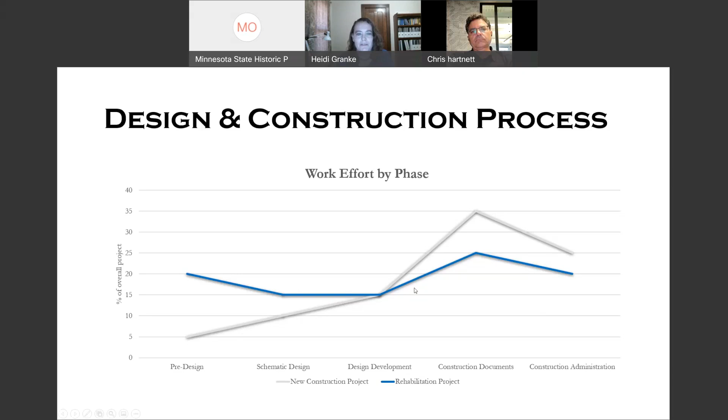It does also take us a little bit longer overall to do the design work on a restoration project. So we just want to make sure that people realize that sometimes our clients pay us based on this new construction scenario, but we're actually doing the work based on the real life scenario of working on a rehab project.

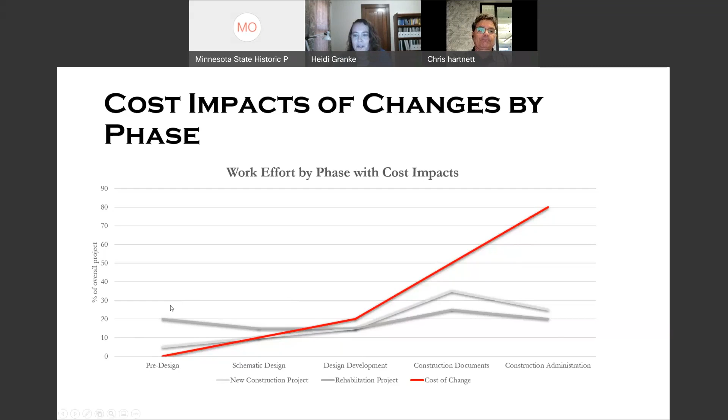So why is this so important? The further into a project that you get, the more a change in the project scope changes the cost of the project. So the more research and investigation we can do up front on the project, the more we can avoid some unexpected changes at the end of the project. This is particularly important if you have limited funding on your project, if you're grant funded or something like that. So that extra money that you may have to put up front for us to do this extra work is going to pay off at the end of the project.

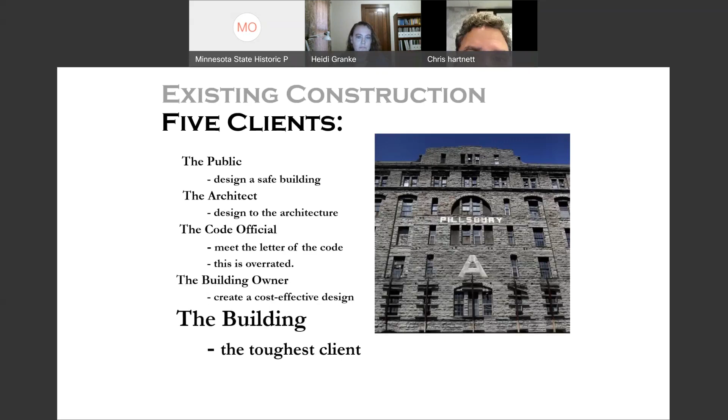then if you go to the next slide, the existing building project has 5 clients, the same 4, and then there's the building, which is really the toughest client. And something that all of us who've done this, if we've done it the first few times kind of poorly, we didn't realize it and we learned our lessons. And hopefully the next slide will give you some reasons why it is the toughest client.

The building, I mean, it's quite stubborn. It doesn't move. It doesn't give in. It doesn't allow you to convince it that it should do something it doesn't want to do. And basically it's very expensive to change. It's one thing for an architect to say to a structural engineer, I need to move that column. So you go into Revit and you move a box and it's all changed and everybody responds to it. Well, in a building, it's there and we have to do something physically to it. So it's much more expensive.

It's mysterious. It's usually covered, so we don't really know what's there. I mean, how many times have you put down to remove a wall and find out it's a bearing wall? And there's just never enough money to investigate up front. And so as designers, we have to decide how much of that investigation is done up front by us and how much do we leave for the contractor and deal with it through the RFI process. And that's always a hard thing to do. It's certainly more expensive to do it on the back end, but again, we never have enough money up front.

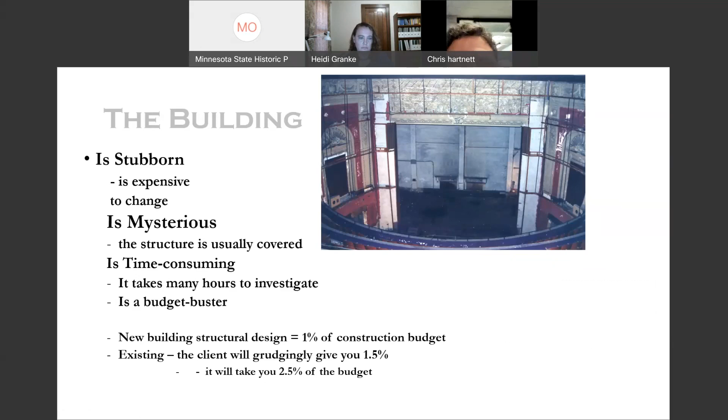Okay, I'm done. So there's 3 main tasks that we like to do before we start design on the building. We want to do the historical research on the building, which includes a lot of different things. We'll go through this point by point further on, so I'm not going to get into it right now. The second part is the documentation of the existing conditions, and then the actual building itself, and then the conditions. These are all related and interrelated. So one will inform the other.

We may be doing some work on the building, in which we identify a couple of building components, and then we go back and we do research on those components. So we've divided this as 3 things, but these really happen simultaneously and are interconnected.

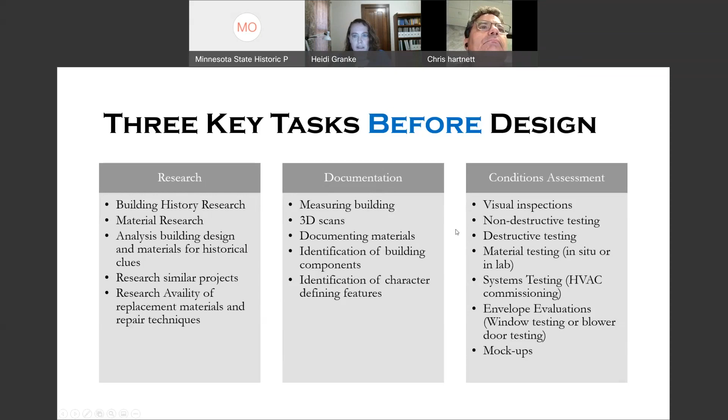So who needs to be on this kind of pre-design team? Really, it's anybody that's going to be working on the project, but then there's a few other people that we might add in that might not be on a typical project. So architectural and art conservators, materials testing laboratories. We may be working with building suppliers just to make sure that we can get materials we need to repair things. And we may need some special access to look at things. So we may bring in some people for that.

So the first thing we start with is historical research. We always start with what's the most available. So the secondary research is usually the National Register nominations or historic structures reports. And the key thing here is we look at the bibliographies and the footnotes on these and see where the primary sources are. And then we go look at those.

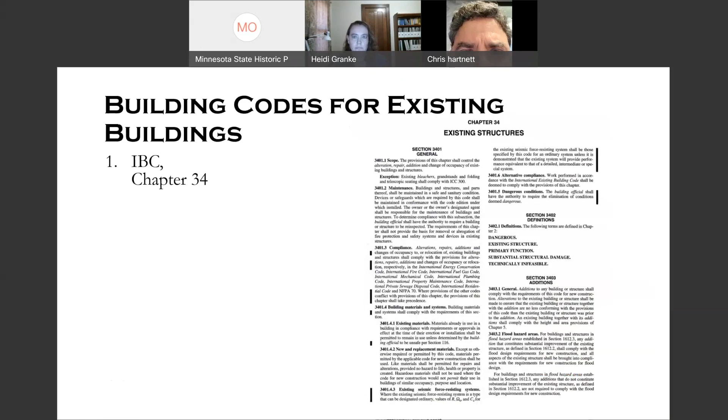And then to the extent that you can, you want to try to find any existing drawings for this building or similar buildings by the same architect. These drawings are worth their weight in gold, because they will show you oftentimes what's behind those walls, and for the structure, what's in that concrete, because so much of any kind of concrete structure is the rebar in there, and you just don't know that unless you have that information. Of course, even when you see that on the drawings, it doesn't mean they're necessarily as built. You do have to do some checking on that.

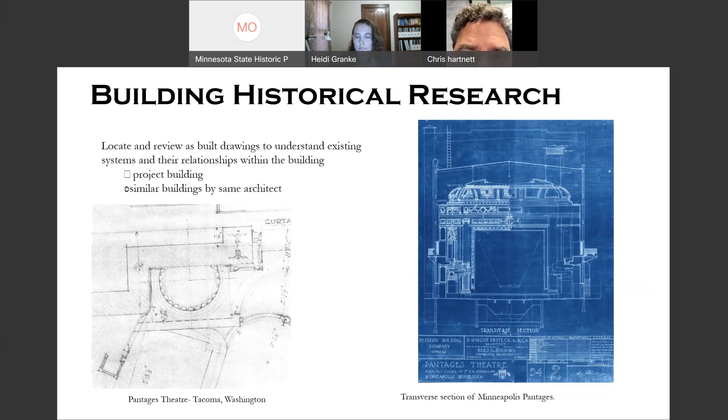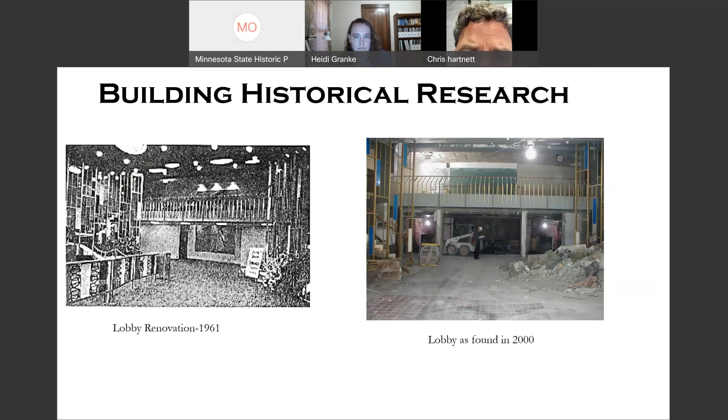Newspaper research helps. Sometimes it provides some things too. So you have to be a little bit creative. I'll say that on the state capitol project, one of my first bits of information was just a guidebook that I found the first time I went into the Capitol. At their visitor's desk, they had a little guidebook that I picked up that had a reference to a 1901 letter. So that's pretty good stuff.

So anyway, okay. And of course, the IEBC is something to dig into. There's a lot of opportunities there to get some special considerations for existing buildings that you don't have for new.

Of course, we have the Minnesota Conservation Code for existing buildings that I've used in the past, and it really is a compilation of the IEBC. It also has fire ratings for historic materials. So anytime you can become conversant with these different publications, it's important to be familiar with those.

So I guess I'm just going to interject. One other thing that's helpful is sometimes if you know which building code the building was built under, you can look up those standards as well, and that can give you some clues on how the building was built. Yeah, that's really key because structurally, if you don't add any load to something and it met code at the time that it was built, you can grandfather that in. But it's important to know when that code is.

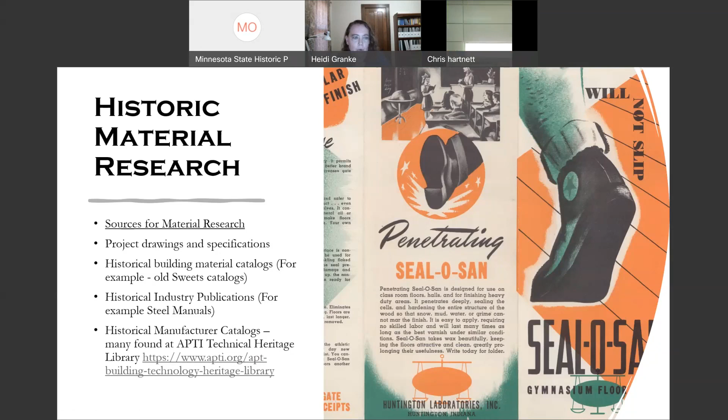So these are some more publications that I use. If you don't have a Kidder-Parker, I would strongly suggest you go out and find one. I got mine for $16 before Amazon was around, and it has all kinds of terrific information for the architects and the builders. It's a compilation of anything from acoustics to elevators to footings.

There's an AISC guide for structural engineers out there on rehabilitation and retrofit, very good. And then the ASCE standard guidelines for structural condition assessment of existing buildings. That's terrific in that it has a table of all the different tests that you should do for the different materials. It's invaluable.

Hey Heidi, one housekeeping. I don't have the slide number in front of me, so I can't do the timekeeping quite so well as I had hoped. So it sounds like you're doing it. Yeah, okay, that's why I'm trying to move the slides a little bit quicker. We're running a little slow here.

Sounds good. This is again, as you find systems within a building, this is an old Guastavino cantilevered stair, literally cantilevering off the walls. I had no idea what it was, and I was able to go in and find his patent for it. So I learned what that was. So again, be creative, fascinating stuff, but you really do have to look around. You have to be a bit of a sleuth on this stuff.

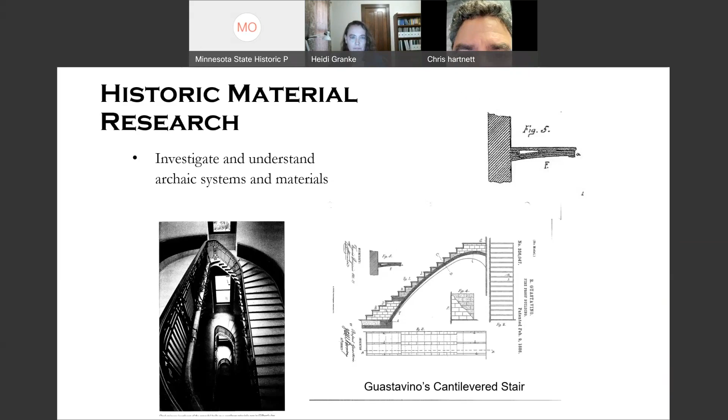So the building itself often gives us a lot of historical clues as well, which will help us date a building. Some component of the building may give us clues that will inform other components of the building. This is kind of the classic: different types of nails, different sizes of wood framing, different types of rivets and bolt connections and that kind of thing.

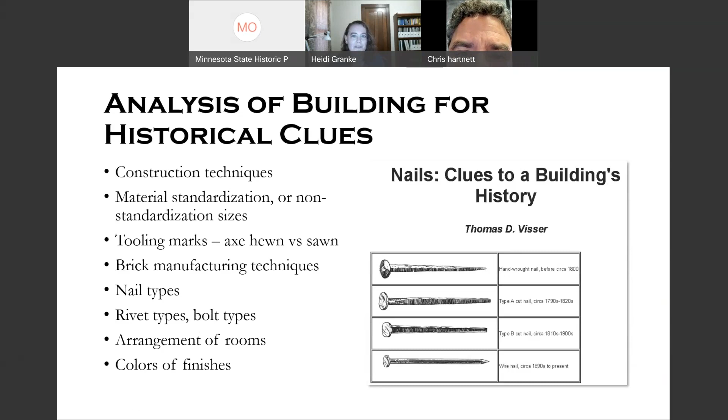And then also the color of the finishes in the room. You can go back to the original finish colors. We all know what 70s colors look like. If you find those in a room, you know that's what it's from, right? So those are all clues that we look for in the building itself that help inform that historical research.

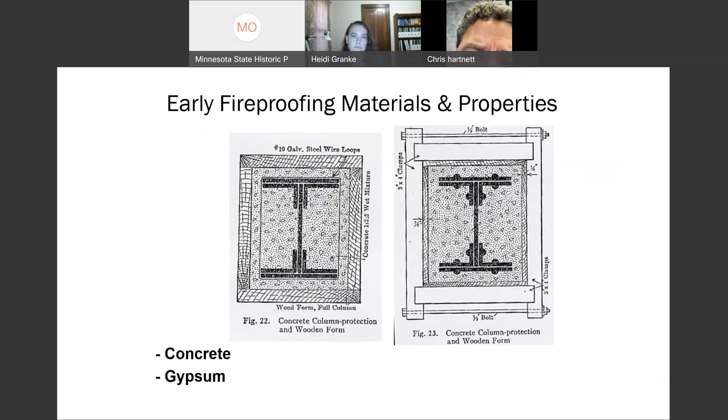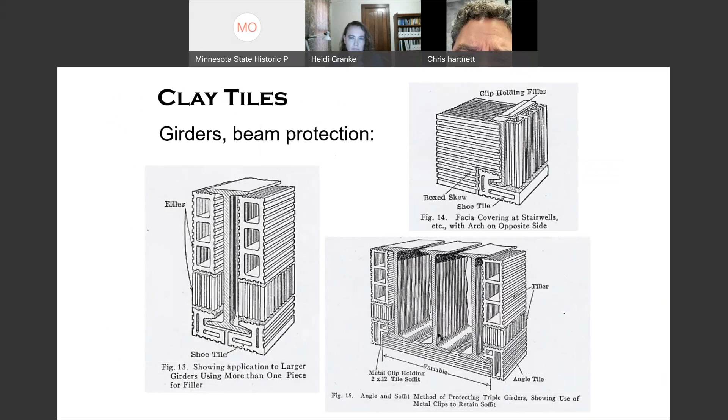Yeah, and so a lot of those references will tell you how these things are built. There's 3 or 4 slides now with just a number of different kind of sketches that I found, I think mostly in Kidder Parker, but in some others too. And they just allow you to see and understand what's there in front of you. So this is just kind of the wealth of information that's available to you.

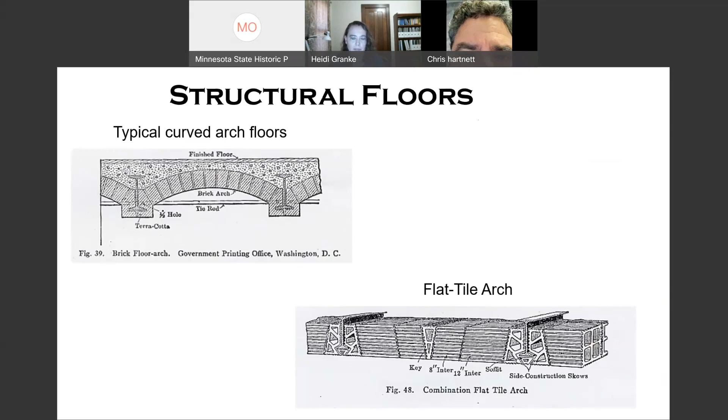So it's really good stuff, and it's well worth your time to do that research, and also to reach out to those of us in the industry asking for that. I'm happy to provide any information I can. We're all kind of in this together, so it's really fun to help people. So keep that in mind as well.

So the other thing that we need to research is just the availability of craftspeople to do some of this work. This is the Conrad Schmitt studio in Wisconsin. They've done some of the work at the state capitol, but they've done work all over the country. And there's some things that we can't replicate because there aren't craftspeople available or there aren't the original materials available. So that's one of the things that we have to look at up close so that we understand that as we move forward.

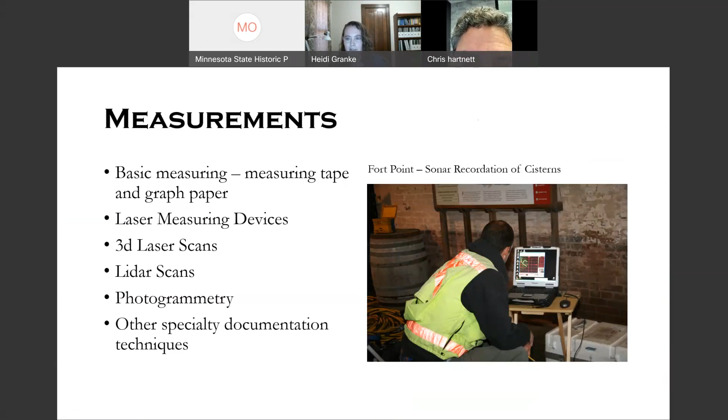So the next thing we do is we just got to do some measurements. There's all the standard ways that we measure, but sometimes we have to use something unique. This is some work I did at Fort Point in San Francisco. We had some underground cisterns that were full of water, so we actually measured them with sonar. I know there's a presentation coming later in this conference on some underwater archaeology and preservation, so I'm interested in that since I got to dabble in a little bit of sonar stuff myself.

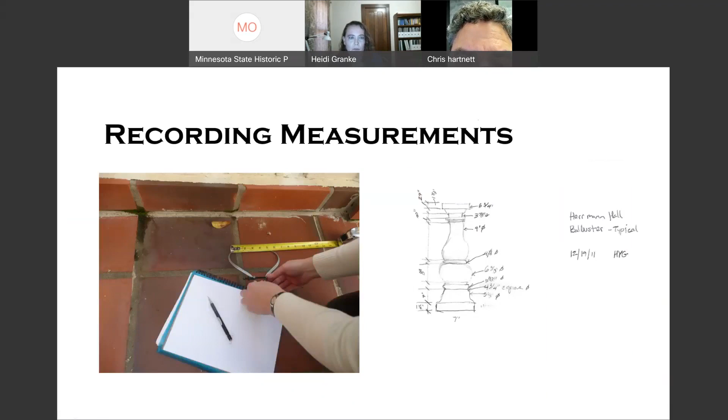So here's just some of the kind of standard tools. I'm sure you're all familiar with all of these. And then of course we record it, and there's several different ways. This is just a hand sketch, which is kind of the old school way, I guess, of doing that.

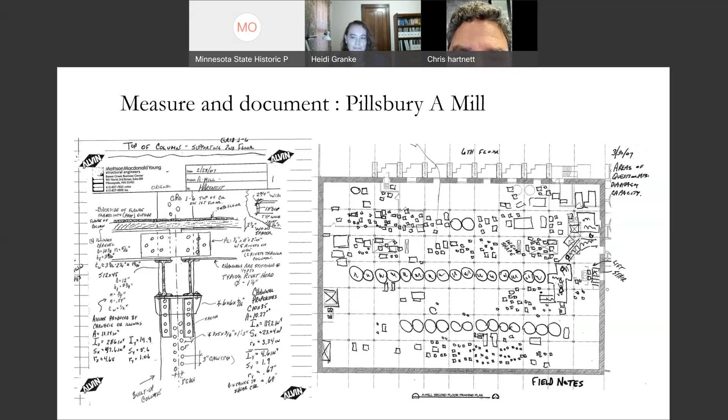So it really is, you measure it and you kind of try to figure it out as you go. It doesn't have to be beautiful. I tell you what, I am not a great artist, but it'll give the information you need.

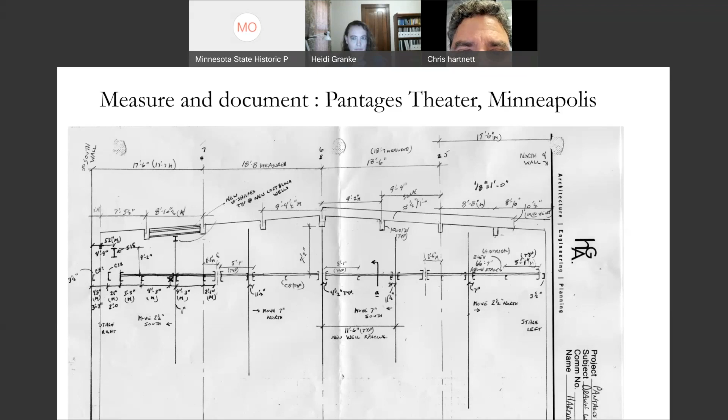Here again, this is the Pantages Theater. It had to meet the Actors Guild requirements for hanging flats, and the gridiron, up in the stage house, did not match that. It was an old vaudeville house. So I had to go in and measure this thing. I spent about 2 months sitting on a lawn chair, 67 feet in the air, just measuring and trying to figure it all out. And based on that, I was able to come up with this drawing of the final changes to it.

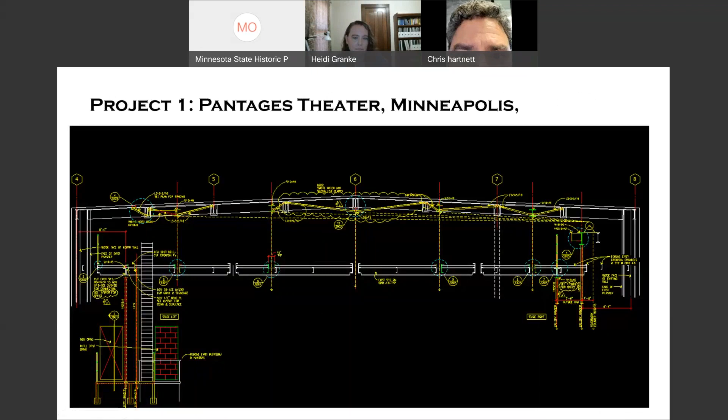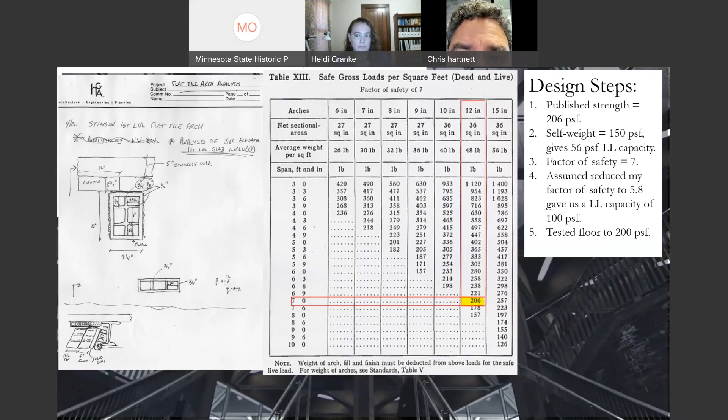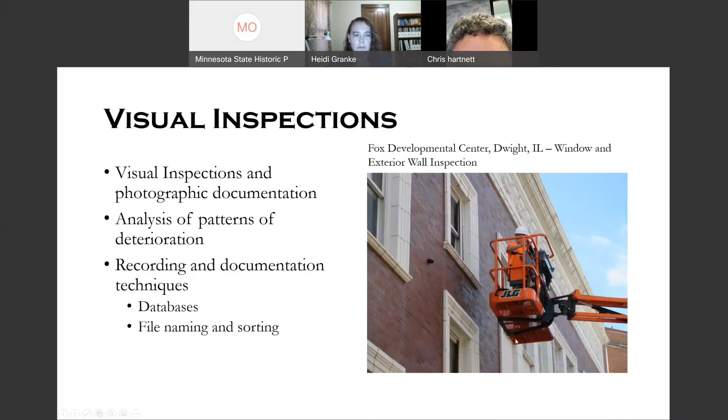So the first thing we usually start with in the actual condition assessment is just visual inspections. That's partly just walking around the building on the inside and out. Sometimes we have to access it from a lift or from a swing stage, or even hanging on rope access or something like that. And then we have to record everything.

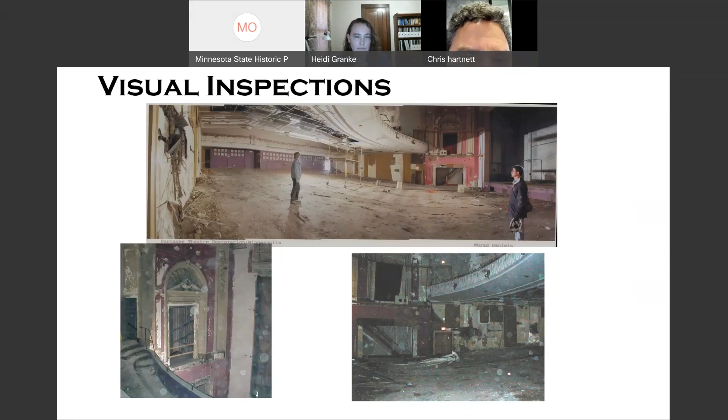You just have to go in and start walking around the old building, just familiarize yourself with it. This is just kind of an idea of what our old theater looked like to start. Sometimes it's not pretty. And in this, I was up in the dome, I was concerned about some water penetrations in there. So it's a reflected ceiling plan of the second dome. There's 3 domes in the Capitol, and just laying out where the water penetration is and trying to get a sense of why and the issues that might be there.

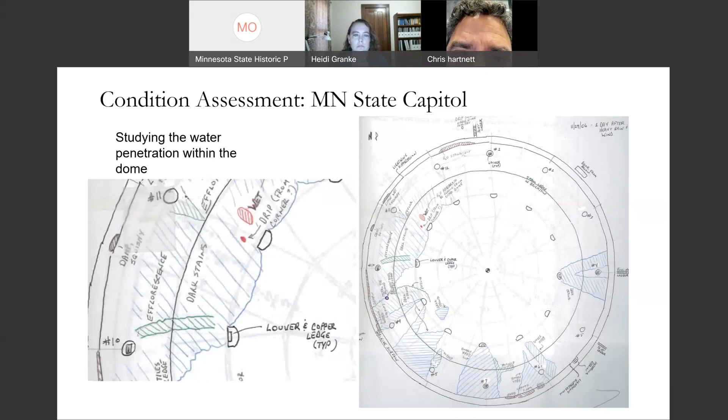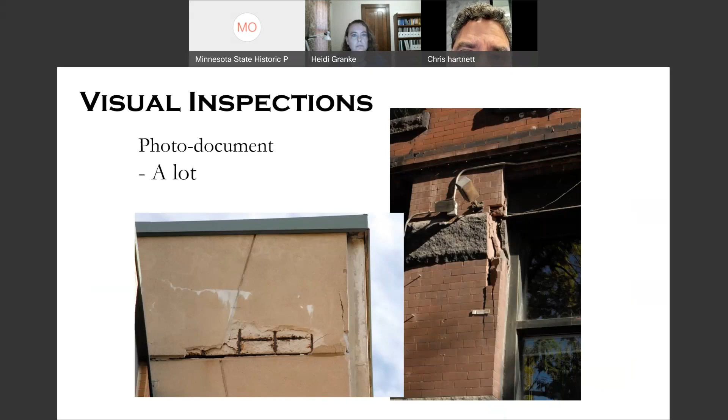Also, again, you want to photo document, and I say a lot. What I do now is I photo document with my phone. I have a long lens on a good camera for distant shots, but I also videotape a lot now because I never get the right photo, right? I'm 2 inches off, 3 inches below what I need, but with the video, a lot of times I'll just go through and video the whole scene, and often I can find a frame that gives me what I need. So I really recommend that. Again, take pictures that you can.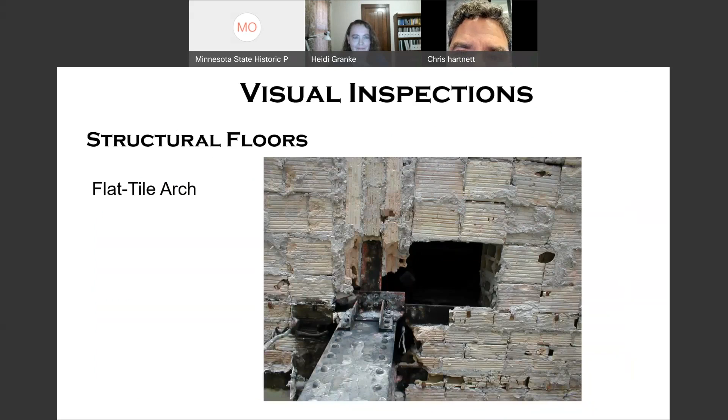This is the flat tile arch for a building that I had no clue about. There is no class in modern structural engineering that doesn't have to do with preservation where you see a floor like this. So, a riveted column with a flat tile arch. So yeah, take pictures. One of the things that is often helpful when you're taking pictures is to put a tape in it or some other visual cue. So this is just an example of that. And then be creative in how you take the photos too.

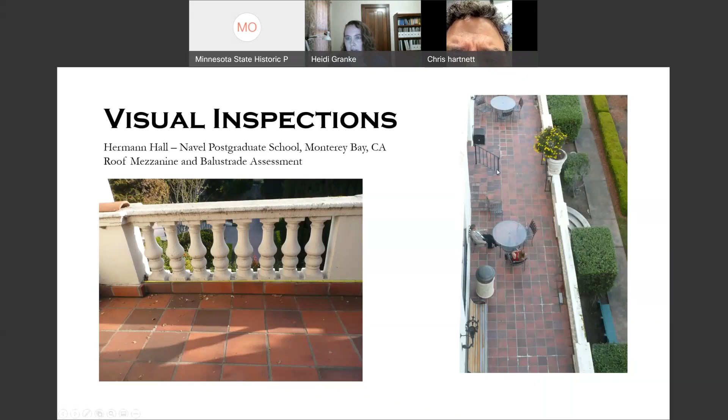This photo on the right here was a tall building, originally built as a hotel, but now an administrative building. We were able to go up to the upper floors and look down on this roof plaza that was leaking, and you can clearly see the areas that have efflorescence on them, and you know that those are the areas where there's been water standing.

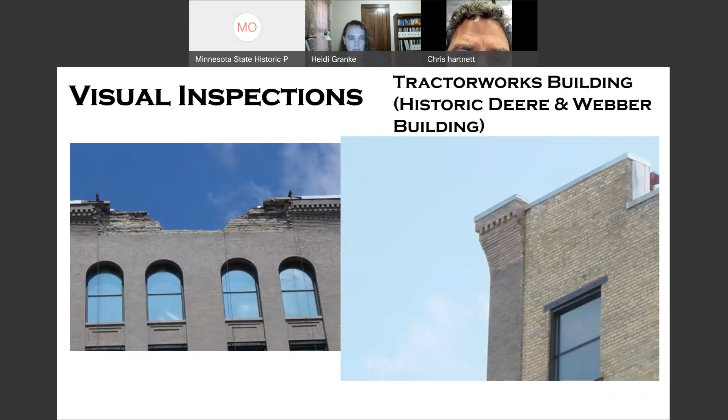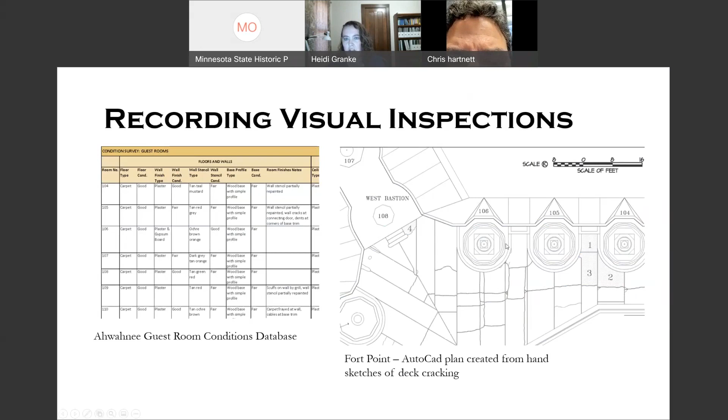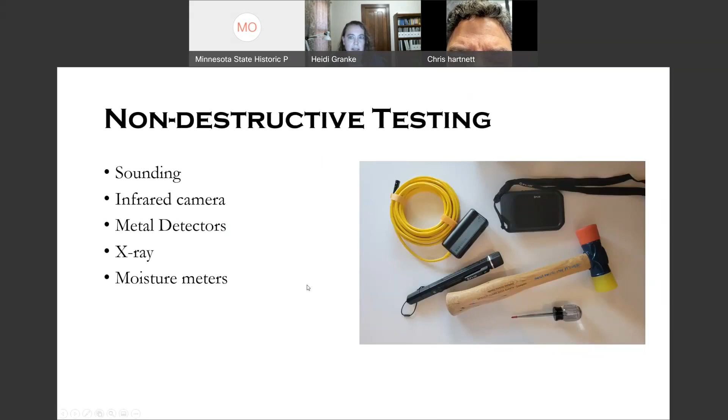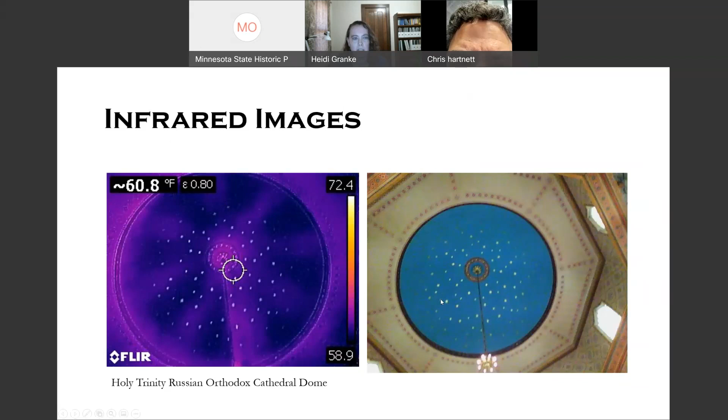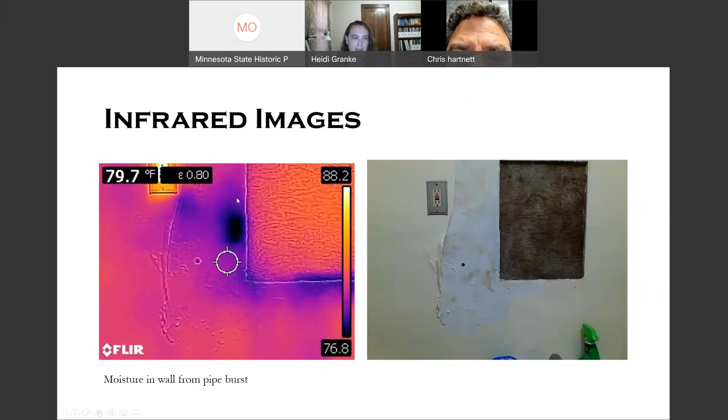This is my old apartment where there was a water leak upstairs from me, and I was trying to prove to my landlord that he needed to repair this properly and take this out. So the first step was just doing these infrared. You can tell specifically where the water is, where it's the bluer or purpler color. And then I took a moisture meter to it, and yeah, it's 33% moisture in there. I picked this photo just because it was readable what the moisture meter was reading. There was one point in the wall where it was 80% moisture content. So obviously that was saturated.

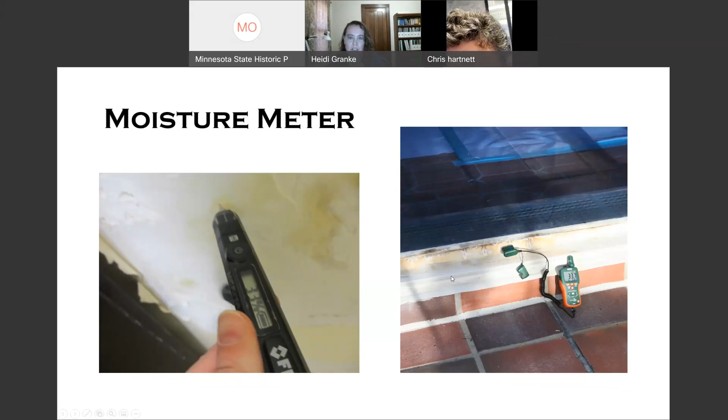There's a lot of different ways that you can test the different materials as well. A lot of the old metals used to be iron first in the 1800s and into really early 1920s, and then early steel started coming on in the last really 20 years of the 19th century, but really started happening in the first decade of the 20th century. But there was a lot of issues with carbon content, and so really what you want to do whenever you come across a metal is you want to get a metallurgy test. You want to have the equivalent phosphorus, equivalent carbon tested in there.

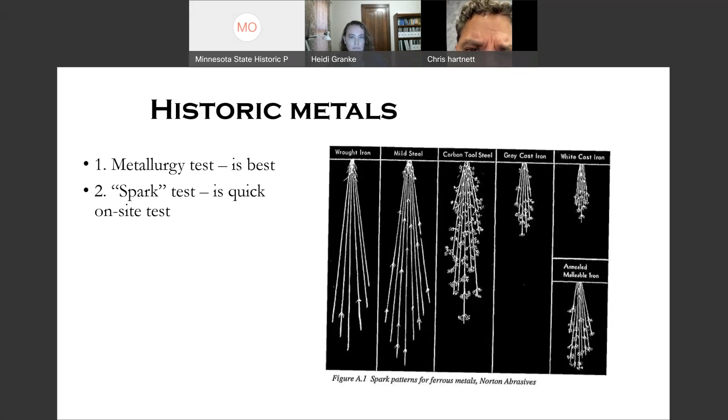But you can do a spark test, which is just taking a Dremel and running it across the material, and you get a spark field that comes from that, and you can tell from that what that material is. It gives you an idea. You never want to weld to a cast or wrought iron, and you also don't want to weld to an early high carbon content steel because you'll crack it. So it just kind of gives you an idea what you've got and what you're working with. I use a spark test early in a project to get a sense of what we have.

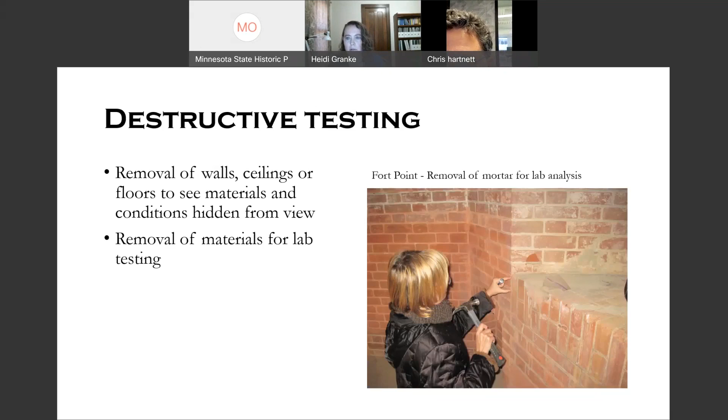And again, you want to take concrete cores to understand the strength. You want to break the cores because you just don't know what the capacity is. So often you have to make a conservative guess if you don't actually do the material testing, and the conservative guess can cause things to calc out that they don't work when they actually do. So you want to spend the time and the money to take the samples that you need to and really open things up and see what's there. So

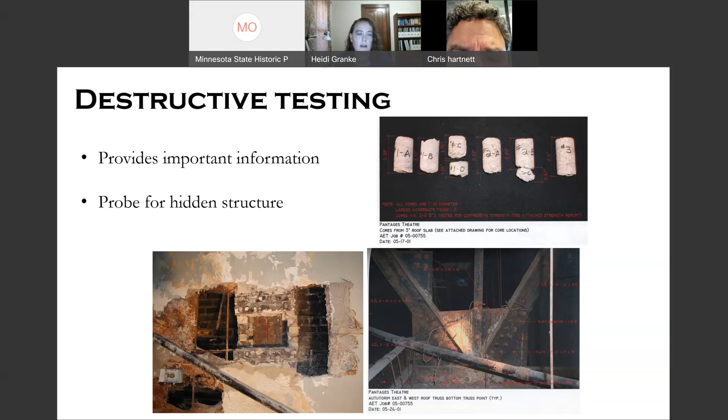Sometimes we get into some more specialized testing. This is me pretending to be an archaeologist for the day at Fort Point. I was under the supervision of an accredited archaeologist, just so you know. But this was a condition where we didn't know what the foundations looked like under this elevated portion of the fort here, and so we just took out a section of cracked concrete there, and then I dug down into there just so we could see what that footing was, and then we photographed it and took notes and sketches and measurements and everything of this.

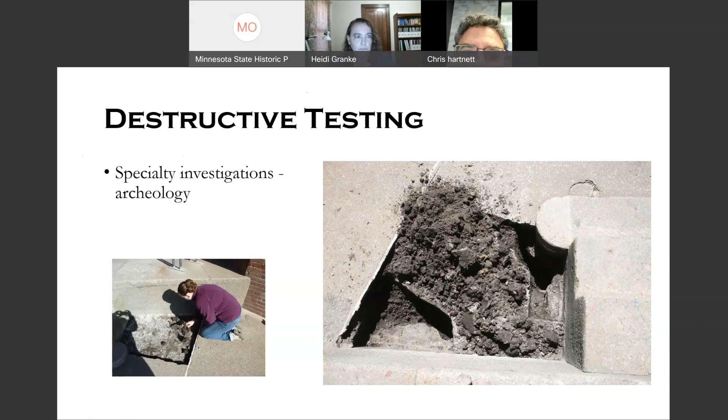So then, obviously when I do a lot of materials testing, there's some materials testing we can kind of do on site, which we've talked about a little bit. But there's a lot of things that we're going to send into a lab where they're going to do more advanced testing. So this is at Fort Point, and we're actually removing some of the biological growth off of this wall to send it in for testing to determine what it is so that we understand better how to treat it and get rid of it, hopefully. And

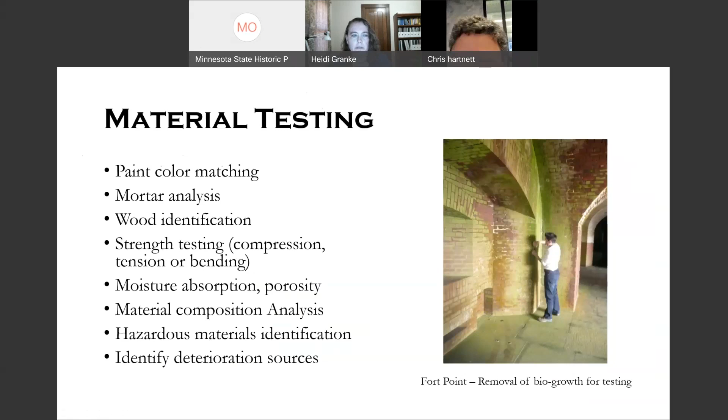These are a couple other examples. This is the Oregon State Hospital where we had brick and mortar that was painted. So this is actually a mortar sample that has paint on it, and we did the paint analysis of this to evaluate all the different layers of paint. We ended up having to go back and repaint that building, but we wanted to go with something closer to the color that was put on it shortly after it was constructed.

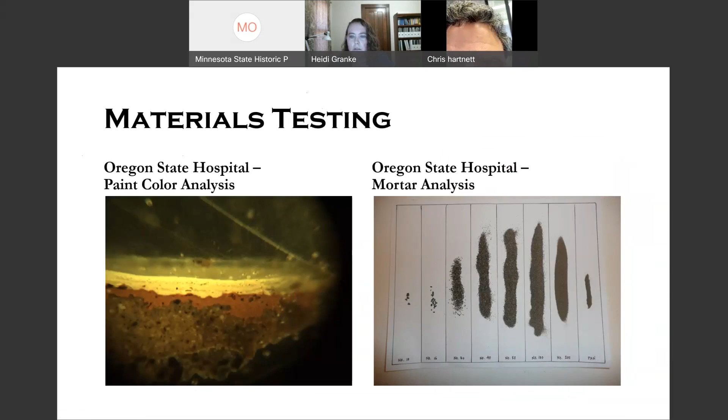And then to the right here, they took some acid and got rid of all of the cement out of the mortar, and then graded all of the aggregate in there in the different sieves. And then they can actually take these and color match them to local sands that are known in the area, and that helps us determine what the new mortar composition should be.

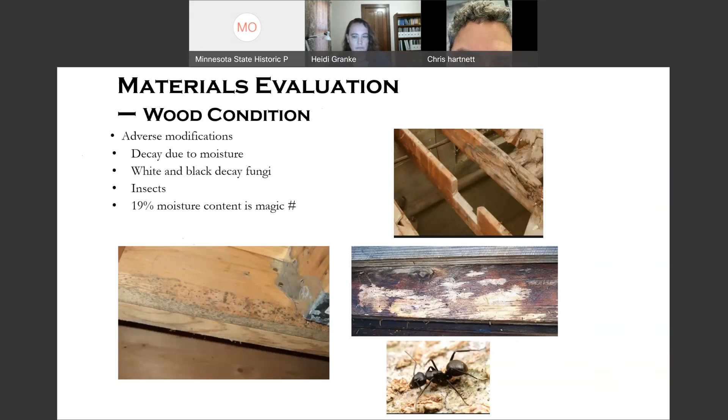We see a lot of wood structures, wood framing in masonry buildings and whatnot. Ron Anthony out in Colorado, I went to a seminar of his. He's a wood scientist, and I'm sure many of you know of him. He said that one of the reasons we lose so many buildings in the United States is that structural engineers don't understand how to grade wood. And one of the things you look at is, like Heidi said, moisture content. With wood, 19% moisture content is the magic number. Anything above that, decay fungi can grow, and insects can get in there, and it can start to decay. There's a number of slides that I'll show about that, but it's important to understand the wood.

The wood condition, and generally with old wood that's decayed, you really just need to replace it. But another thing to do is to check the wood species, because wood will look similar. And I'll tell you that generally structural engineers who don't have a background in this will take spruce pine fir #2, look in the catalog, and that's the capacity you get. And actually there's a number of woods, especially red pine, which is really common in Minnesota, that are quite a bit stronger.

And so what I do is I send this out to a retired wood scientist in Minnesota, Bob Seavey, and he'll give me a species for it, and then I can look up what the capacity is for that species. So it's an inexpensive test. He does it for, I don't know what it is now, about $100 a sample, and you can get about 15% extra capacity if you know the species. So.

The other thing is wood grading. Historic wood is not stronger than modern wood, but it is generally clearer than modern wood, meaning there's less flaws. And so if you grade the wood, we all do, again, structural engineers, SPF #2, and generally you can get a #1 or better. And it's really easy to do.

You look for the number and the size of the knots, checks and splits, angle of grain, and then you can increase the capacity up to 30%. I've gotten up to about 45, almost 50% in a piece of wood, just by grading it and getting the species. Generally, if you can get 25% extra capacity, you're doing well. But hey, it's a couple hours, it's $1,000 worth of work versus having to reinforce a complete floor.

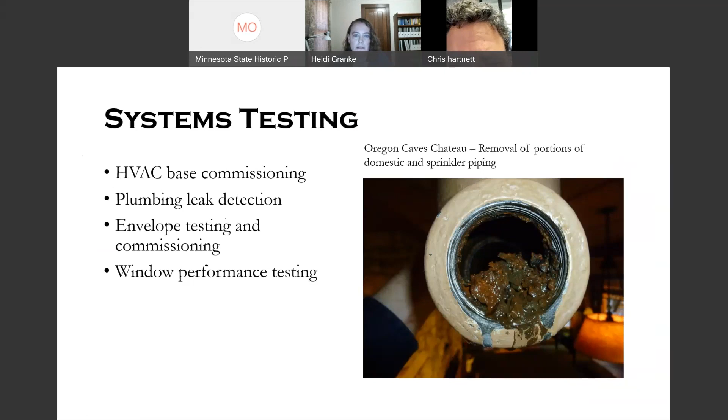Oh, that's gross. Don't want to drink through that. Well, it's a sprinkler pipe. You wouldn't be drinking through it, but well, I don't know. I might.

We found historical information that they had done some mock-up panels of several different mortar types during the original construction of the fort back in the 1850s, one of which was a mortar that included some iron slag in it. So it was a very strong mortar. We actually found the old mortar patch on this wall. The mortar itself was in great condition, but as many of you would expect, the brick around it had defaced.

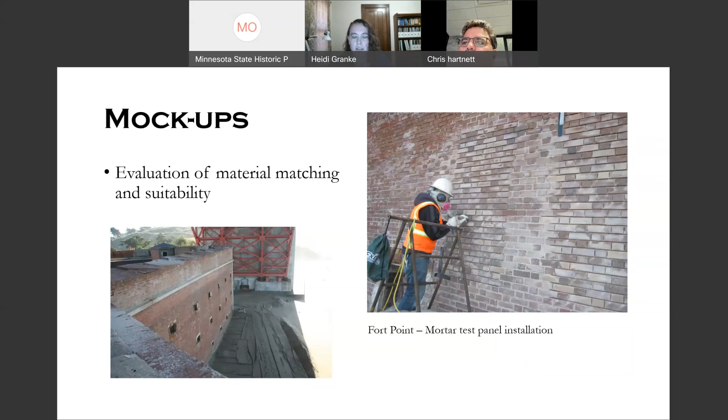So we redid the mock-up. We had 3 different scenarios of mortar that we put in here. And we had the luxury on this project, because we knew there was going to be a delay between the time we were doing this investigation and the time the project was funded, that we were actually able to leave this for a few years in real life conditions to see how it held up.

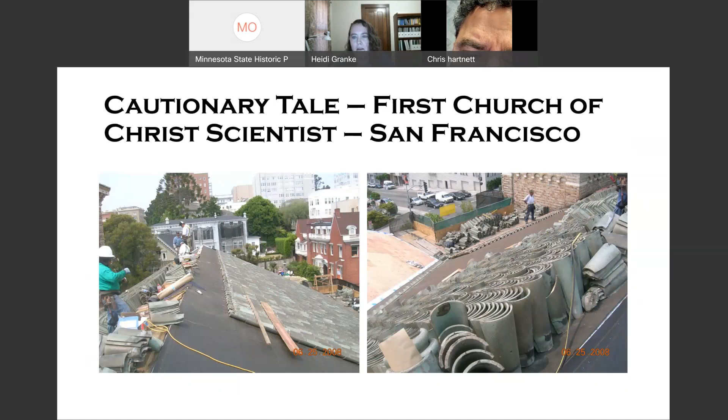Well, finding a custom glaze to match, and this was a range of colors, it's not a single color, in a really short time period, it's not possible. So in this case, we ended up having to put a new, much brighter glazed tile on the most hidden portion of the roof, and keep the historic tile on the most visible part. But again, if we'd known up front that this was going to happen, and we'd been brought on earlier in the project, we could have worked with some of the clay tile manufacturers and probably come up with something way better and much closer to that.

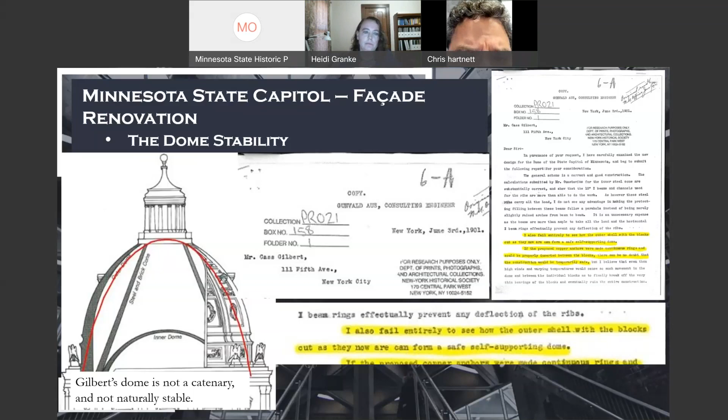So this is a project that many of you know about, the state capitol facade renovation. And I was on the project early on. Like I said, as I was trying to understand the building, I came across the guidebook and a conversation between Gunvald Aus and Cass Gilbert. Aus had sent a letter in 1901 saying this dome really isn't stable. It doesn't follow a catenary. So he made some recommendations on how to make it stable. So this is, again, a case study. We'll go to the next slide. I'll show you.

And so he recommended that copper anchors, tension rings, be put within the thickness of the outer dome to create tension that would prevent the blowing out of that dome. So that was kind of the next piece. But then the problem was I came across some early shop drawings showing they had replaced the copper rings with iron for cost savings. This was built in 1895 to 1905, and in that time there was a pretty bad recession going on. Because copper didn't oxidize, that would have been fine.

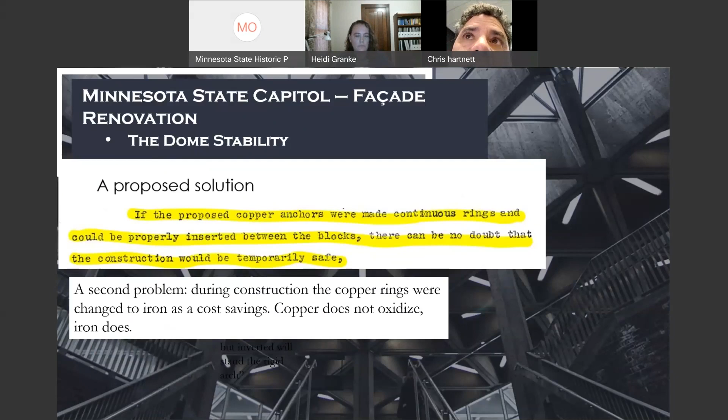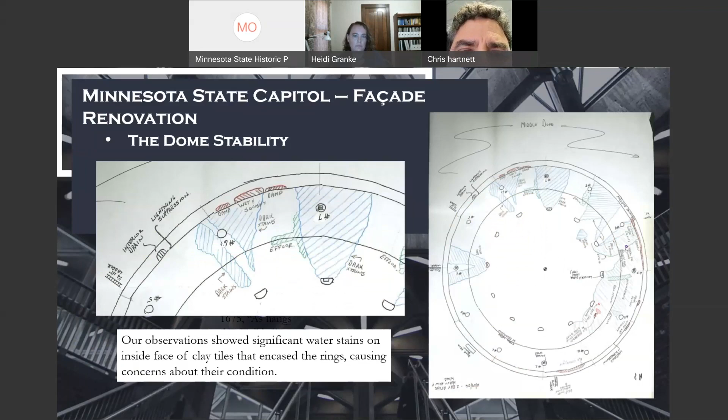As it turns out, and it was interesting, we had a testing company, AET, come out, and they opened up some of the tension rings, and they were fine, surprisingly. And I think it was because they were embedded between the outside marble and the interior tile backup, and I just don't think they were getting enough oxygen for them to corrode. But we did find that the early I-beams that were supporting the lantern at the top, it's kind of like a teepee of these sloped beams that were supporting that.

Kind of the bottom 4 feet, a number of them were quite deteriorated, and so several of them had to be replaced. After I left HGA, Sean Cotton did that, and you know, it was a little bit of luck that we found those, but again, you have to get up in the structure and you have to look around and you have to find everything you can.

And I think the key that I'm trying to say here is that if you do your best and really look, then things will kind of jump out at you. And you really do have to have a hands-on approach to these things. Hands-off, just asking the architect to give you something when they're done and then seeing if you can just pop your structure in there, generally doesn't work in this kind of work.

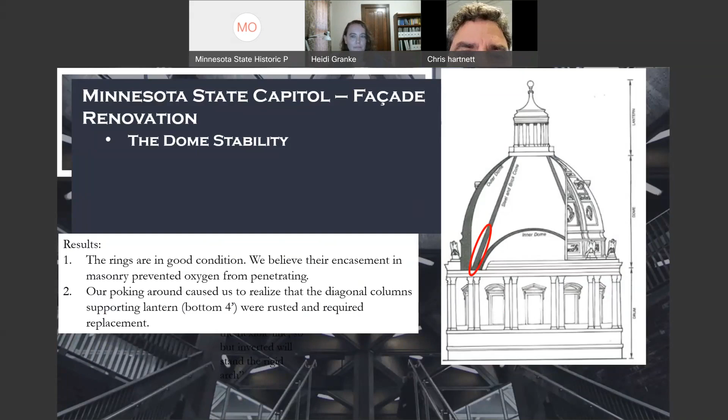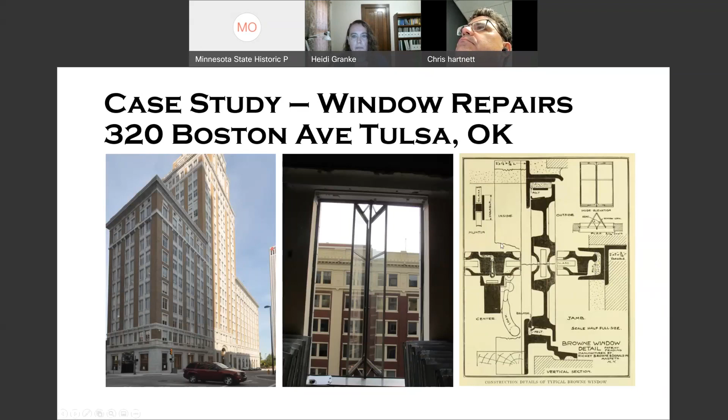So what are we doing here on time?

And this is one of those things where the people that were doing the work intended well, but they didn't have the background in preservation, didn't really do the historical research they needed to, and didn't really fully understand either the construction materials and techniques, or the actual historical significance of the building. So I did a full HSR on this building, and then worked with them for the first couple of stages of the restoration.